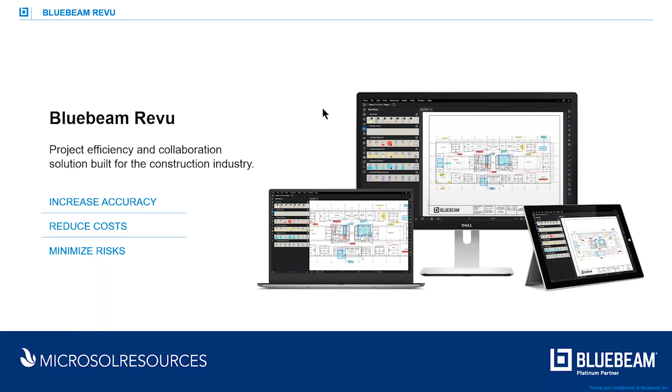Again, the standard propaganda that comes from Bluebeam, but it's true that the files are fast. The information is stored not only graphically, but in text form. And again, you can set up tools that will allow you to standardize the process of marking up your files.

So the number one item here is the improved rendering speed. It's kind of tricky to show this to you, but I've loaded up a 3D file to take a look at. The load times really haven't changed very much, but I've noticed there is a major improvement in being able to move around in a file. I don't know if any of you ever work with 3D files. The 3D aspects of the software are pretty amazing, but there will also be improvements just in 2D files as well. The larger the projects, the more data visible on the screen, the faster it is going to render.

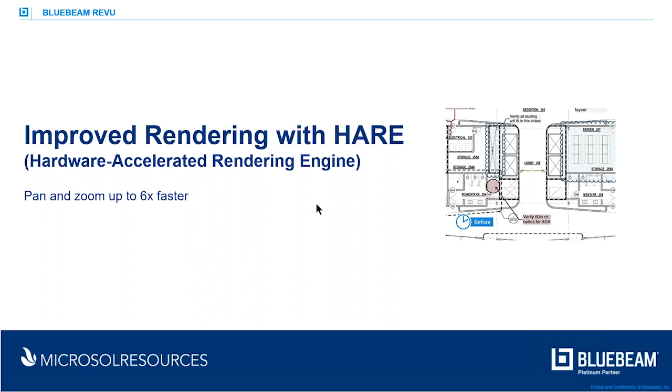Let me see if I can get the actual product up here. Okay, so I've preloaded this particular file. Oh, well, I thought I had preloaded it. Looks like it's going to load up again, so we'll wait a second for it to load. This is a three-dimensional model of the building I live in here in Philadelphia, which I modeled in Revit and then printed out to PDF form. I did have it ready to go so we could avoid this load time, but we'll get to see what the load time takes for 3D models, and there it is.

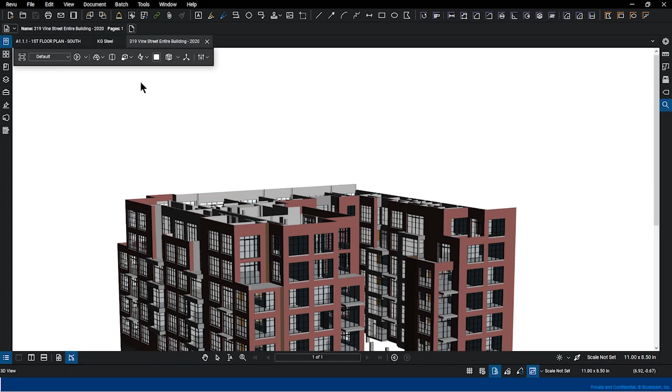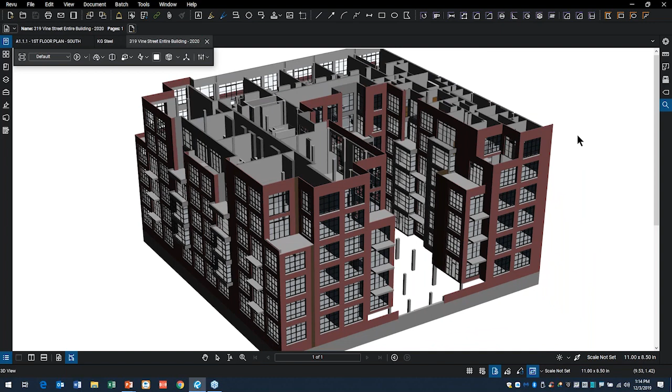My unit is right here, on the third floor of this section of the building. This is in perspective form. Let me see if I can get it to tilt a little bit here. I'm just moving the cursor around. It's a little slower with the on-screen sharing than it was without that, but the performance is pretty fast.

Now, you can set up all kinds of different lighting, so I can set up lighting here so there's none. Oh, that's not good. Let's set it up as day lighting, right? And you can have that sort of an image.

You have the ability to come through and adjust other finishes on the building. So you could decide you wanted it to be... I've got one here called illustration, and it'll change the building to... it didn't look very different on that one, or it's still thinking about it. Oh, it's still thinking about it. So again, the speeds—there we go.

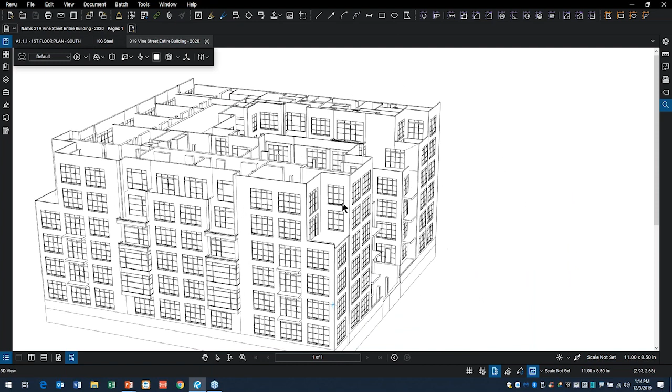The ability to move around in here with a three-dimensional model is pretty fast. This is a fairly big model. Let me see if I can get my 3D toolbar back up.

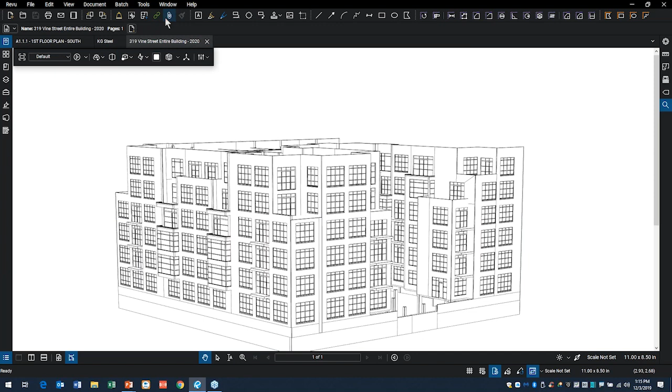You can also play with the cut plane on this particular model. There's a cut plane you can cut through the model with, and you have the ability to select that. There are poles on the X, Y, and Z axes that you can drag up or down, so you can slice through the building in a three-dimensional model.

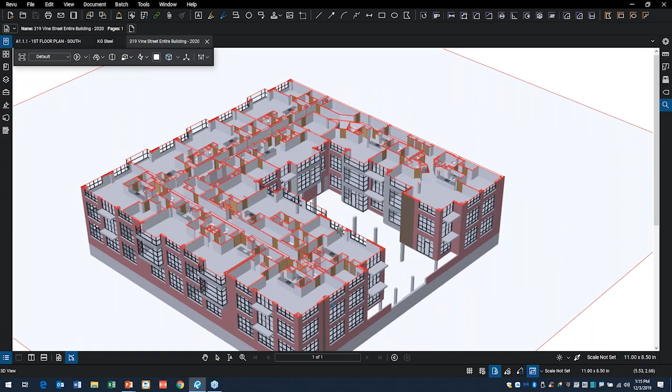The improvements in speed are pretty significant. Again, we have a lot of detail in here. You can see I've got the stove, refrigerator, and sinks, and there's a lot of bathroom fixtures. So it's pretty easy to move through the project fairly quickly.

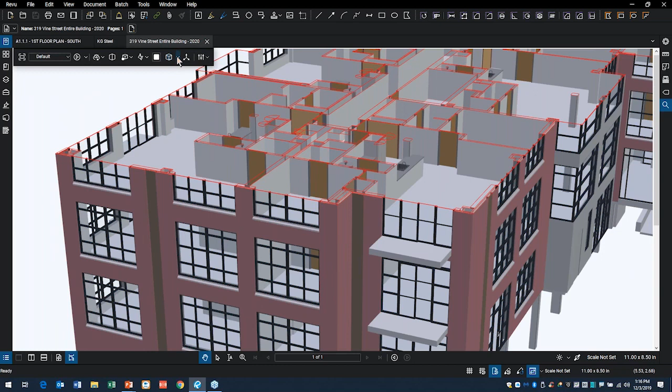Again, I can turn that cut plane off if I want, to hide that. So again, this is one of those things that's not easy to demonstrate. It'll probably be easier for you to see when actually using the software itself.

The thing that is pretty easy to show, and I think is the most amazing aspect of the product, is the quantity takeoff improvements.

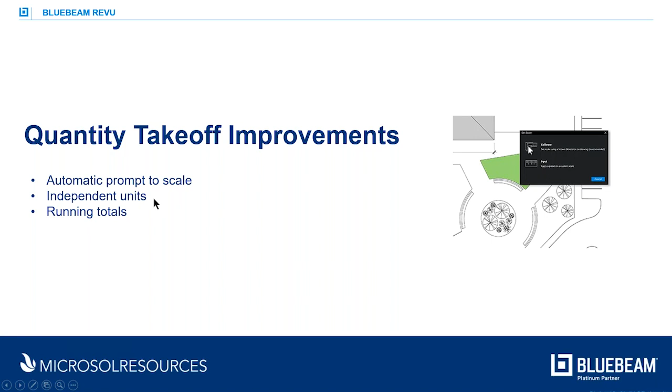There is now a prompt for scale if it doesn't exist in your file already, and the ability to use independent units for the same kind of markup. So if you're doing an area markup, you can set it for square feet or square yards if you're doing carpeting, or cubic feet or cubic yards if you're doing volumes. You can use those to do calculations in the markup list at the bottom of the screen.

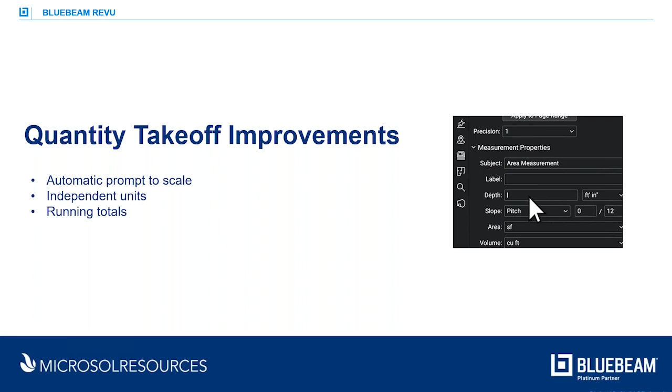So I wanted to show those particular items to you. Let me go back to the software. I'm going to close the 3D file so we don't get bogged down, and open this one, which is a site drawing.

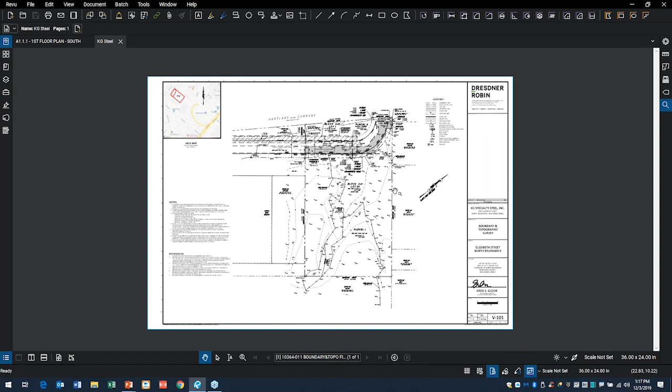One of the things that's interesting about this particular drawing is that at the bottom of the screen, on the right, there's an item that says scale is not set. One of the things we always talked about in training is calibration. It's very important to calibrate your file so you know how large things are, because if it's not calibrated properly and you're measuring, you'll get different lengths, areas, or volumes than what the drawing represents.

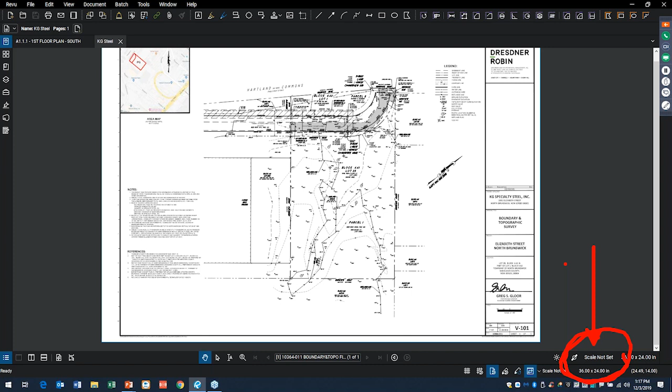There are two ways to do calibration. You can pick two points and set your distance, or you can use scale. This particular file says the scale is 1 inch equals 30 feet. I don't see a lot of actual physical measurements in here that are very long, there's a couple here, like 60 feet, but it would be better to have a longer distance if I could.

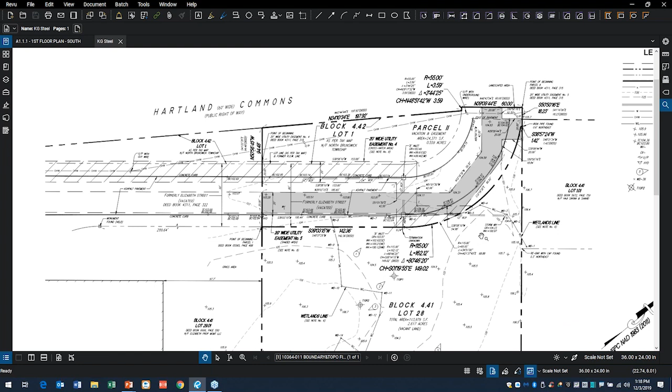So I'm going to use that particular scale, 1 inch equals 30 feet, when I go to put something on here. Let's say I wanted to do an area for whatever particular reason. I'll go over to my tools and my measure, and choose area.

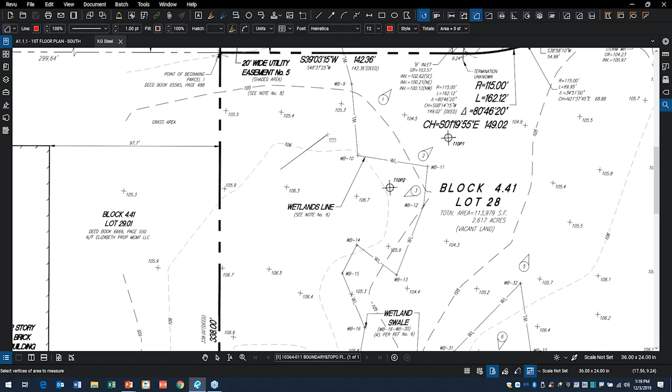As I create my boundary, I should have calibrated before this, but I'll double left click at the end, and I get this box that you normally get when you start by calibrating. But because the scale is not set in this particular file, it's going to ask me to calibrate it or to set a preset scale.

So instead of calibrating, since I have a scale of 1 inch equals 30 feet, I'll click on that particular input. You can do a custom scale if you want, or use presets. In my preset list, I have 1 inch equals 30 feet, built into the software.

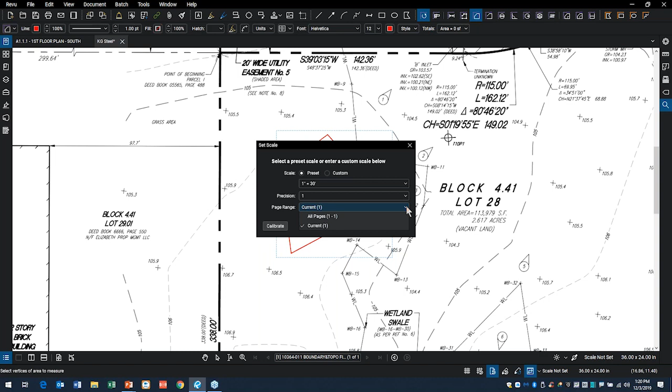I can set my precision, maybe to an inch, and I could set the page range. So if I had more than one sheet or more than one page in this document that was at 1 inch equals 30 feet, I could go ahead and set the scale for all of those.

I can then go ahead and say, apply the scale, and it creates my square footage for me. So that is a really nice feature in the software, being able to ask that question.

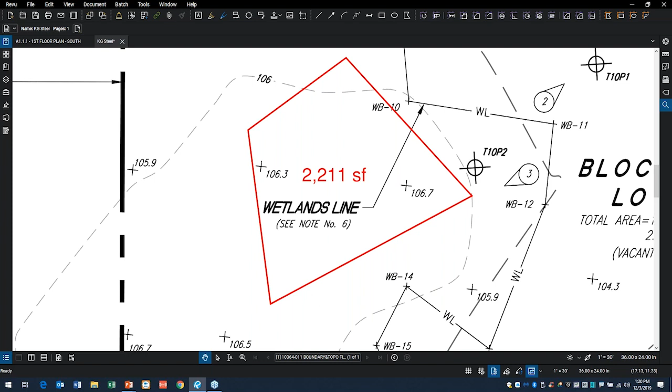Now, another thing that is part of this new calibration and being able to change your different values for the same function, this particular thing with an area tool. What I've done is I've created over here on the left-hand side of the screen, using the Tool Chest tool, a couple of different area tools. So I've got ceramic tile, carpeting, and flooring in here. But you'll notice that I have this same item, which is area, right?

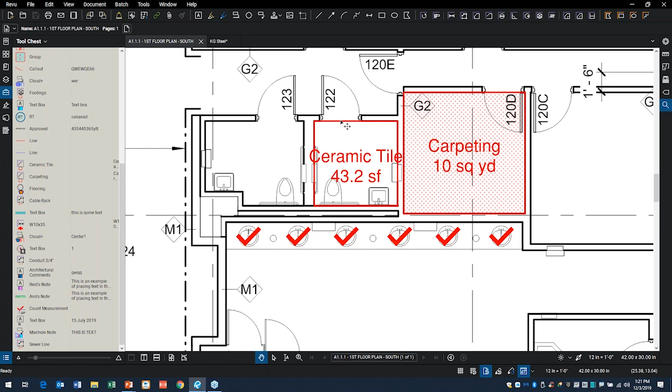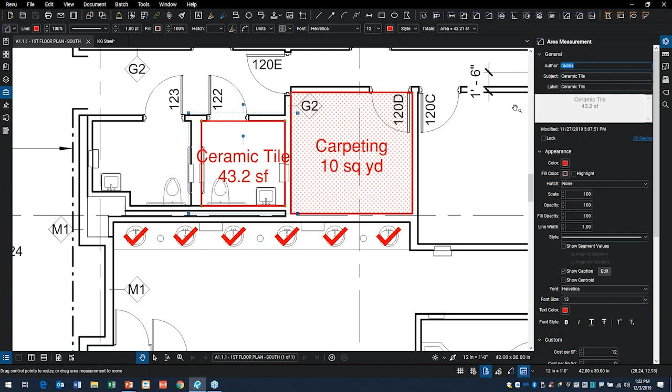So let me minimize this on the left. And if I select this boundary and look at what it is over here on the right-hand side of the screen, that particular item is really an area, and it has all of the same items in it as this. So these are really the exact same measurement tool. Up here it says that's an area measurement at the top.

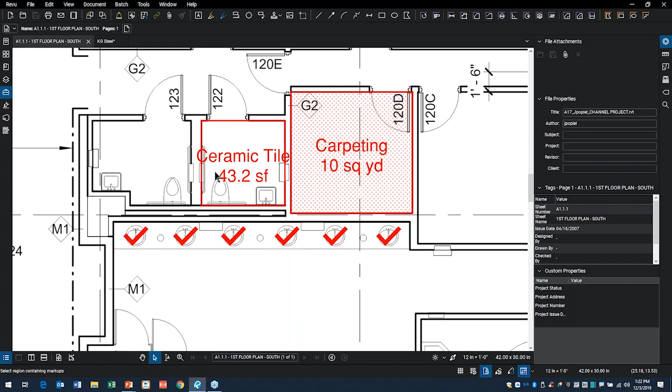And if I click on this one here, that's an area measurement too. So they're both area measurements, and yet I've got one set here to square feet and one set to square yards. So how do we actually achieve that?

Well, the way you do that now in this particular release of the software, if I were to just do an area in here, and I'll just go ahead and quickly go around this boundary, not going to worry too much about getting it placed exactly.

It's going to use the default of square feet. Let me try that again, see if I can get this guy to move over. There we go. So you can move the text by holding down the shift key. So this is square feet, but maybe that's carpeting. I'd like that to be square yards.

So you'll notice that we now have a new item up here in the properties bar called units. And if I go to my drop down for units, you'll notice that I could take area if I wanted to and change that from square feet to square yards.

That was impossible to do in previous releases. And if you are trying to do those kinds of takeoffs, it's such a fantastic improvement. I can't even begin to tell you.

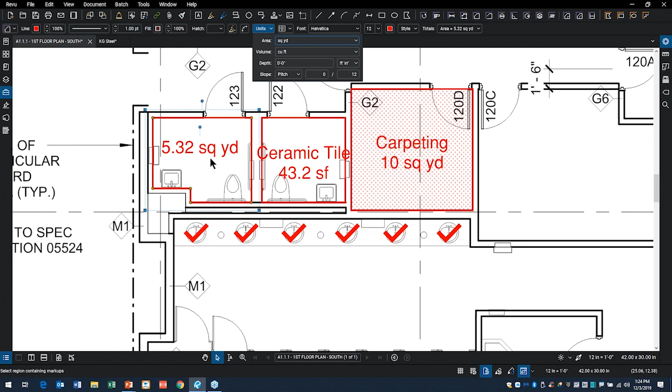I'm going to actually show you the difference that it makes in terms of your markup list at the bottom. I could also try, I'm not sure if my match property tool will work, let's see if I can get this guy. If I use my match property tool and match it onto this, I get the pattern. Yep, the only thing that doesn't change is the name. I'd have to add carpeting to that.

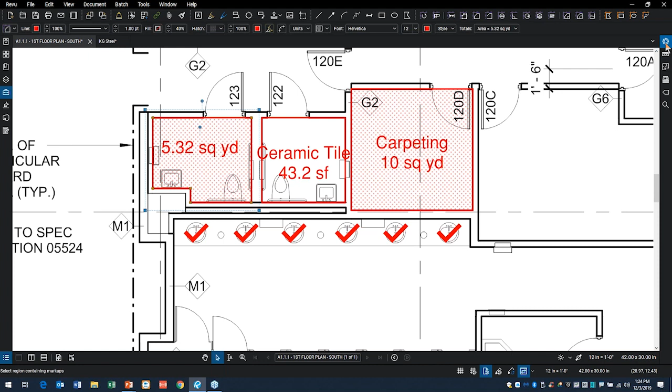But now if I select this and come back over into its properties, it's now called area measurement. I'll change that to carpeting. And I can come in and add a label to it if I wanted to also. So if I wanted it in there, there it is for me. So if I want that to appear, I can change that there.

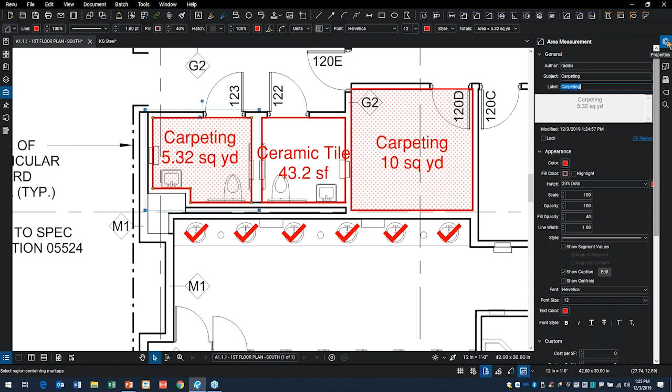Even better than that would be to set that up as a preset tool. So if I had another area, of course, I don't think carpeting in the bathroom would be such a good idea, so I'll go ahead and delete that. But we might have a room here that would have carpeting.

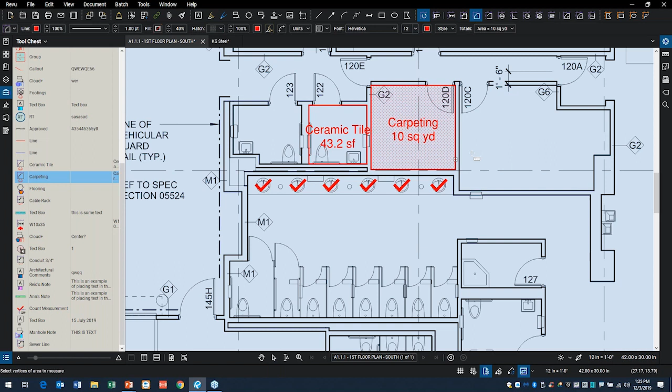And again, if I were to take this tool and create it over here in my tool set, I could double-click carpeting, and then trace around the room. And again, for the sake of speed, I'm just going to drag a rectangle. And it would come in as carpeting using square yards.

And now if I wanted ceramic tile, I'd choose my ceramic tile tool. And again, for the sake of speed, just draw a rectangle, and it would be using the label ceramic tile, and it would be using square feet instead.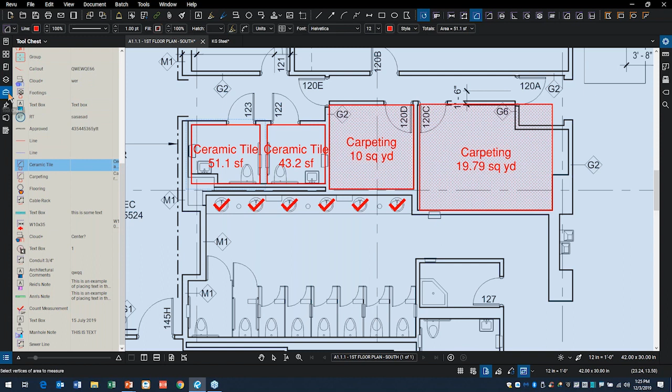If you have other items you want to list within a particular area, you have the ability to select it and add additional call-out information, either in the measure tools or property tools. Oh, here it is - show caption. It's under properties, and if I edit that with this tool, I could add things like depth, volume, length, width, or height to the label.

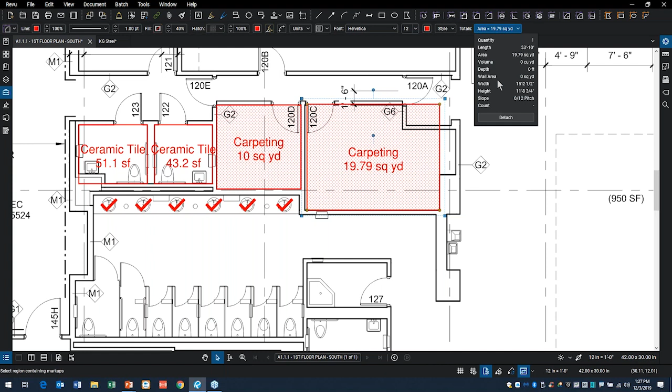That was built into the previous software. The other thing that's nice in this release is up on the properties bar at the top, you now get a drop-down with all this information. It's also listed in the markup list at the bottom of the screen, which allows you to quickly see if you don't have any depth set, so you can go set that in the properties, either at the top or on the right-hand side of the screen.

But having these different values now for the same measurement tool allows me to do some very sophisticated stuff in my markup list. In previous releases, I wouldn't have been able to have it read out this way with square yards or square feet - I just couldn't do that.

What would happen is I would have all the areas as square feet, so then I'd have to set up a special column with a formula that took square feet and divided it to get square yards, and multiplication factors. I'd have all these extraneous columns in the markup list that made it very complicated to generate your costs.

Well now I don't have to do that anymore. I can create custom columns for cost per square foot and total square foot cost, now from the markup list columns, manage columns. You've always been able to do this, but instead of having to create formula columns to try to get square feet to square yards, I don't have to do that anymore.

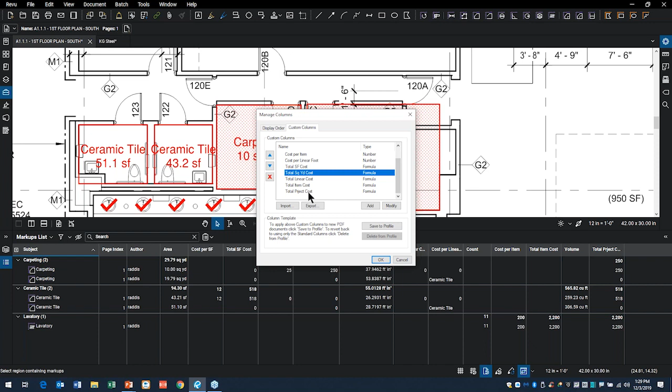For my cost per square feet, I can simply make that a number column. Same thing for cost per square yards - just a number. Then for my total square footage cost, I can set up a formula where I multiply area by the cost per square foot column I just created. Same thing for square yards, linear costs, or item costs. So now I can create these custom columns.

One thing you'll notice now is that the display order I've created for my columns at the bottom of the screen, and the display order itself, are the same. So if I move a column in the markup list or change its order, it will stick - it will stay. These will be exactly the same.

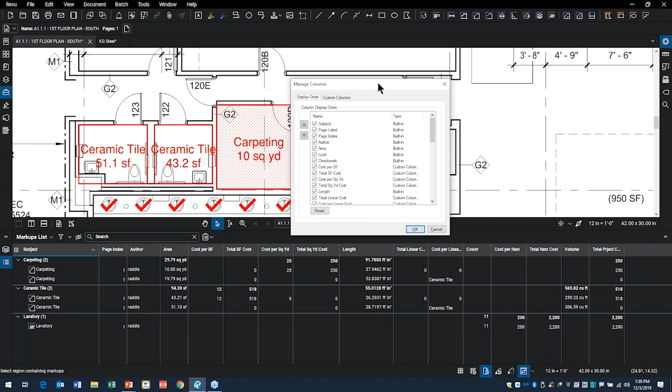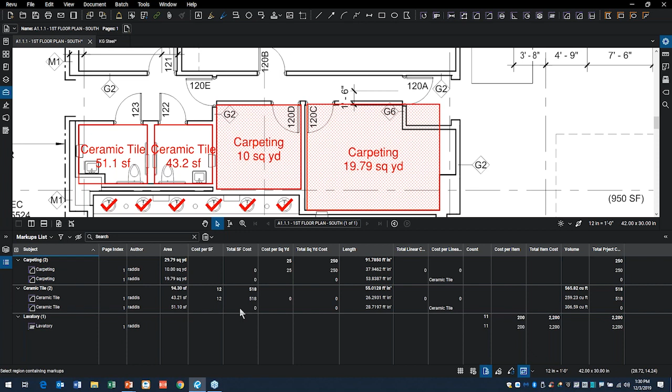In 2018, if you moved something to a new position, as soon as you opened manage columns and picked OK, all the columns went back to their original default position. It was frustrating, to put it politely, and had never worked that way before. They've corrected that in 2019 - the programmers at Bluebeam are not planning to fix it in the 2018 product. So if you're in 2018 and frustrated with that, please move on to 2019, because that issue goes away. Plus you get this wonderful new feature of separate area, linear, or volume values for the exact same tool, which you weren't able to do before.

Also improved a bit are these more complex fills. I usually take my time on them, but I'm going to see if I can do it a little faster today, maybe a little messier, but let's see if I can get it to function for me. I'm not seeing it there.

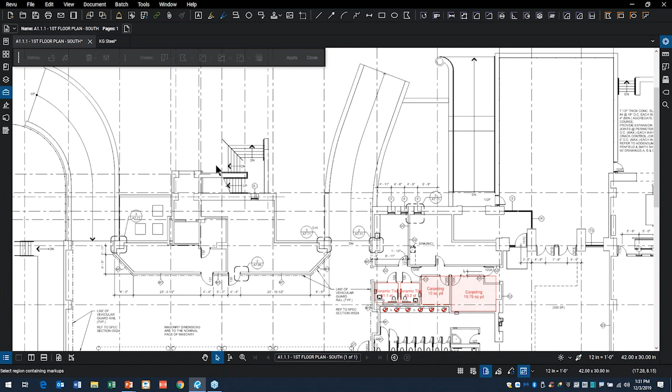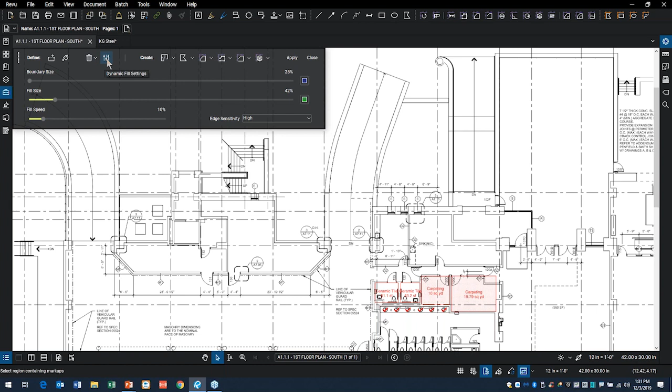Let me come up here to Tools, Measure, and down to Dynamic Fill. If you haven't played with Dynamic Fill, it's a new feature added a few releases back. There are settings to allow you to set your boundary size, the speed of filling, and the size of the fill. I'll click on the Settings tool again, then click on the Fill tool. You basically hold down your left button and start to fill in the boundary - I'll go ahead and do that.

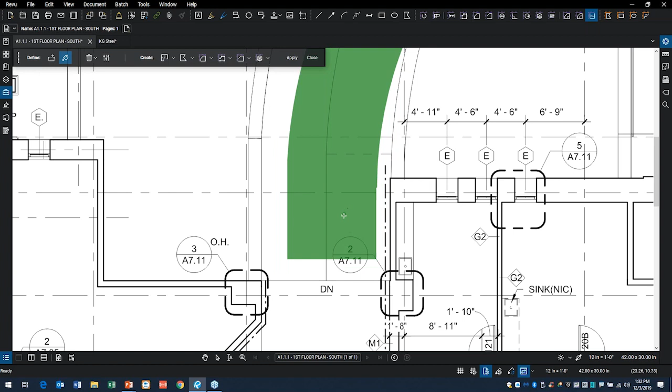You can work a little bit faster in this release than in previous releases, and I've just got a little tiny bit more here and there. It seems to be a lot more accurate in this release than it has been previously. It had a tendency to very quickly spill over edges.

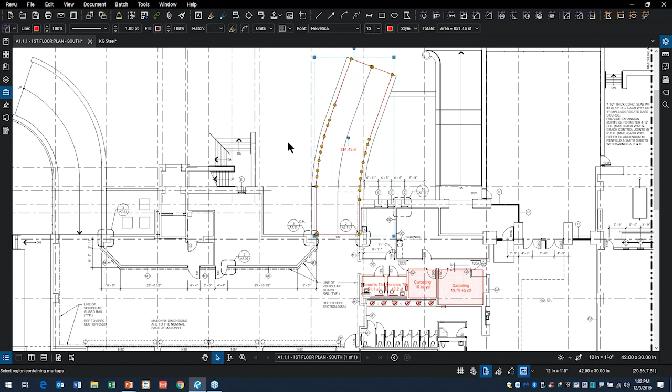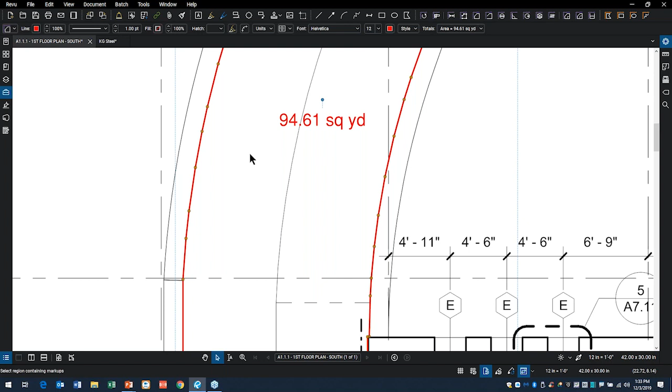What you do is choose what you want it to be up here at the top. I want this to be an area calculation. I can apply that if I plan on doing more fills, or simply choose close, and very quickly I get my square footage calculation. If that was supposed to be square yards, I could very quickly select that, drop down to units, change square feet to whatever else I want it to be, like square yards, and it'll convert over to that.

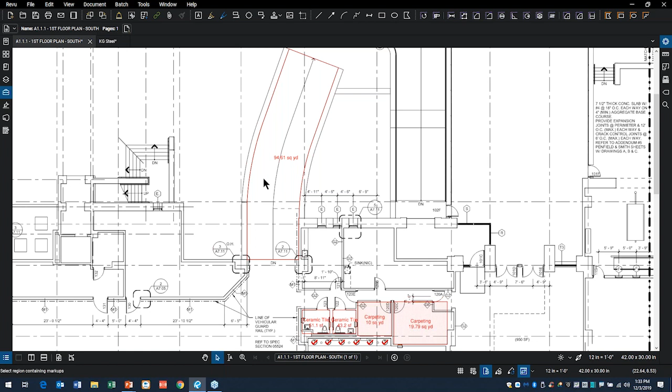I can't really begin to express my gratitude to the people at Bluebeam, because when I'm doing training, that's one of the big questions: how can we do that? And the answer is, previously you really couldn't. There were ways around it, but it was much more complicated. Okay, so that takes care of that particular feature.

Let me go back over to my demo. Let me make sure I got all three. Yeah, so these running totals you'll have in your markup list. One of the things that's a little bit tricky to do is total project cost.

The problem is right now I'm sorting by subject, and none of the subjects have anything in common, so I can't get a total project cost because of that. But all I need to do is find a column that has everything exactly the same. At this point, it's either the page index or the author column - these two columns have everything exactly the same.

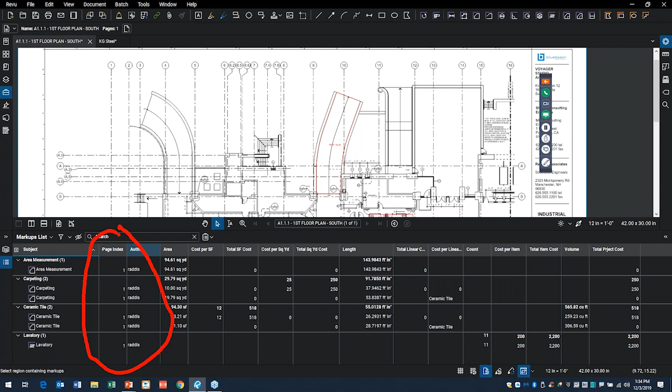You can always put a dummy column in if you want, called sorting. And if you click on that column, it will now sort everything, and suddenly I now get my project total. So I can very quickly get my project total simply by sorting on a column that has common features.

I can always go back to sorting by subject, and I have the ability to export this to a comma delimited or an XML file that I can open in Excel or any other program that reads that, and you can do your cost estimating in there.

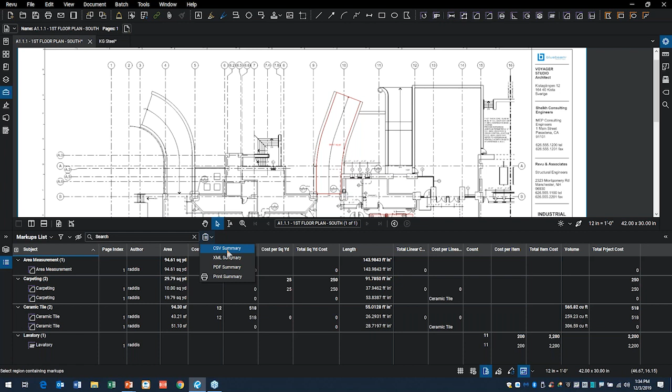Okay, the final item, which may not be of much interest except to a few out there, but it could be an important item - actually there's two items left - is the Bluebeam Revu configuration editor. I'm going to take you onto the Bluebeam website to show you how to find the Revu configuration editor.

Prior to this release of the software, if you're the person in charge of trying to set up and install the Bluebeam software, you had to basically open up this very complex file with a special editor, and you really had to understand what you were doing. The text over here had to be exact - you had to find the exact feature, and then know exactly whether to set it to a 1 or a 0 or whatever it is you wanted to do in order to configure the software for your office.

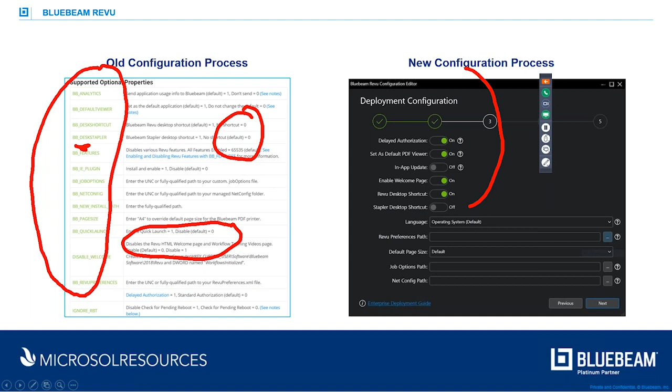So how do you get to this? Well, after tearing out 3/4 of my hair talking to Bluebeam support, saying 'you just do this' and me saying 'no, that's not really getting me there,' I finally got a hold of one person who walked me through step by step.

So I want to have you see this in case you want to do it. What I want to do is go to support.bluebeam.com. I'll come up here and go to support.bluebeam.com, and it takes me to this screen. Yes, we know Revu 2019 is here. Then we go to the bottom of the screen and find Revu Deployment.

I'll scroll to the bottom, left click on Revu Deployment. That takes me to this page, which is my knowledge base page, and I'll go to the bottom of the page and find the Revu Deployment package. So I'll scroll down here—there's my Revu Deployment packages.

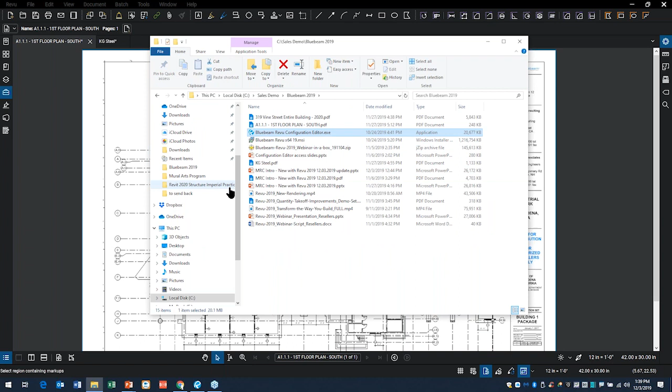So I'll go ahead and do that. I'm going to minimize this, come back out to my folder, go down to the folder where I have this, and I'll double left click the editor. That should start up—and there we go.

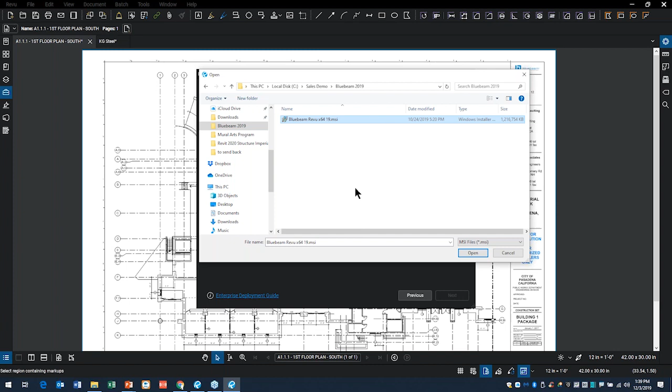So there is my deployment editor, and what I want to do is click on a new deployment. The MSI file is critical, so that is the file that was downloaded with the program I just downloaded, and I'll go ahead and open that.

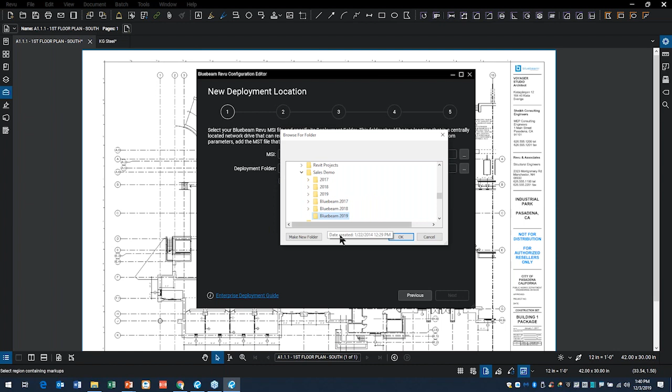You then choose your deployment folder. I will put it in the same spot that I have, even though I'm not going to create it, I do need to pick a spot for it. So I'll go ahead and place that in the same folder, my sales demo, my Bluebeam 2019. I'll go ahead and pick next.

Now, if you are creating a deployment where you have a serial number and a product key, and you want it to be licensed immediately, you would put that information in here. I am going to create a demo, so this is a trial version—I get 30 days. Next.

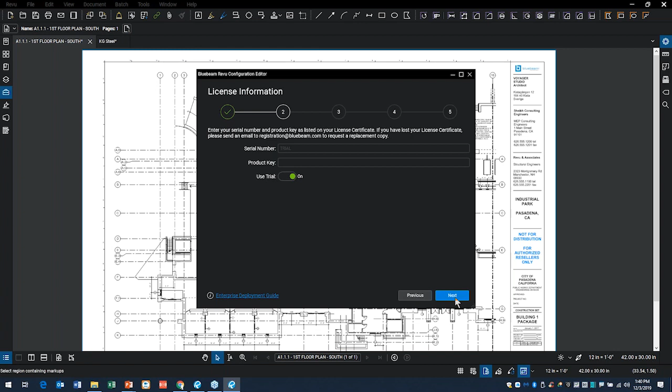And here are my configuration screens. So I can come in here and decide on delayed authorization or not. Is this my built-in default PDF editor? Do I want a welcome page when it comes up? Do I have a preferences path for different items? Go to next.

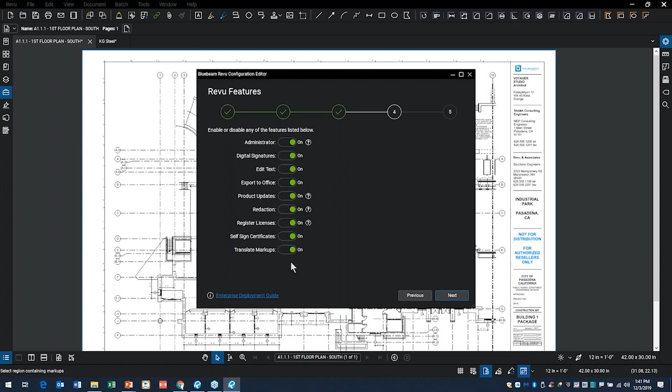Do I want people to have administrative privileges or digital signatures or some of these other items on here? Next. Do I want to put these plugins into these different products or not? Next. And my deployment folder, skip pending reboot, and silent install—and I would click create at this point.

I cannot emphasize how easy this is compared to the old version of the configuration tools. So if you do need or understand the ability to create a deployment, it's pretty easy. The hardest thing is actually finding it on the Bluebeam website. I'm going to go ahead and close this and say yes, I want to exit.

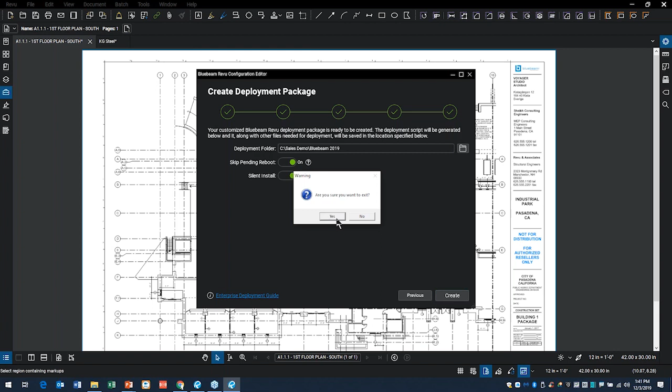Okay, the last thing I want to show you with the few minutes I have left—what this will allow you to do is view your drawings. You'll still need the software to edit them, but now you can view your uploaded PDFs in your sessions and projects.

So now you don't have to go through Bluebeam to get to it. You can use any web browser. Again, you still have to have privileges to upload the files, so you still have to be an administrator to upload files for viewing drawings, but you can get to it online with any software.

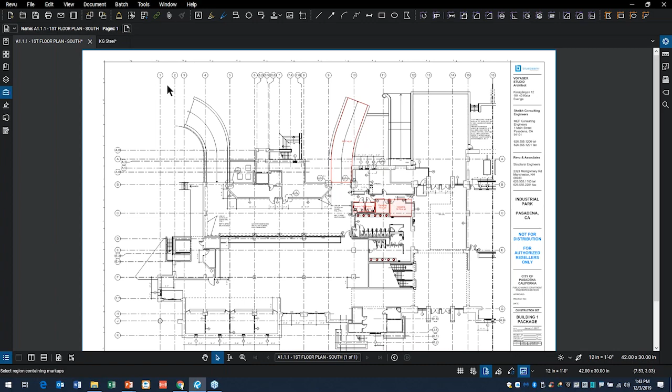I'm going to click on the bookmark I set for Bluebeam drawings. It takes me here, and if I click on this, it shows me I need to upload drawings. While anyone with the Bluebeam Drawings app can view drawings for free, you'll still need active maintenance to upload your files.

There's some information here, but you can really get there simply by going to drawings.bluebeam.com. Let me find it. Wait, that's not it, that's where we just were. So let me come up here to drawings.bluebeam.com. Again, if you need to access the software, you need an ID and password.

To get into Studio, it shows you all of your projects on here. I guess it's not going to be sessions, it's just going to be projects. So I misspoke, I apologize for that. And you can get in there to view your files.

I can access drawings.bluebeam.com from any device whatsoever. Now I don't think I have, well maybe I do have the ability to create a new project. Let me see if I can do that. Project, let me try demo 2019. I'm not sure it'll let me do that.

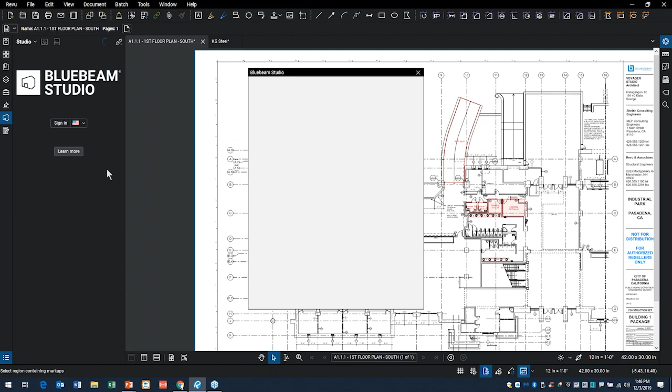I've just created this project, and if I go back into Bluebeam and come over to Studio and sign in, I think it's going to say I'm already signed in. Yes, there we go. Not really. So let's go ahead and sign in here and come up to my projects, sessions, projects. There's my demo 2019. So no files in there yet.

I don't know if I actually upload one, if it's going to appear. I haven't really tested this, but let me try uploading a file. I'll add my open files, say OK. Those upload to here, let me go back over to here. I guess they haven't been published for review or drawing log. I haven't played with this extensively, but it's a new feature I haven't totally played with.

Those are drawings, there's Studio, project name. Open that. I've got settings in there that I can set. There's my project ID, date, and owner. Again, I haven't played with it extensively in terms of being able to see the drawings, but in theory, if there's a published file in here, you're supposed to be able to see the drawings.

So I guess I haven't published anything yet, just uploaded them. That's another new feature which will take me a little time to get used to, but it's supposed to allow you to view published documents from your phone, your iPad, really any device, Android, Mac, or Apple-based—a nice new feature in the software.